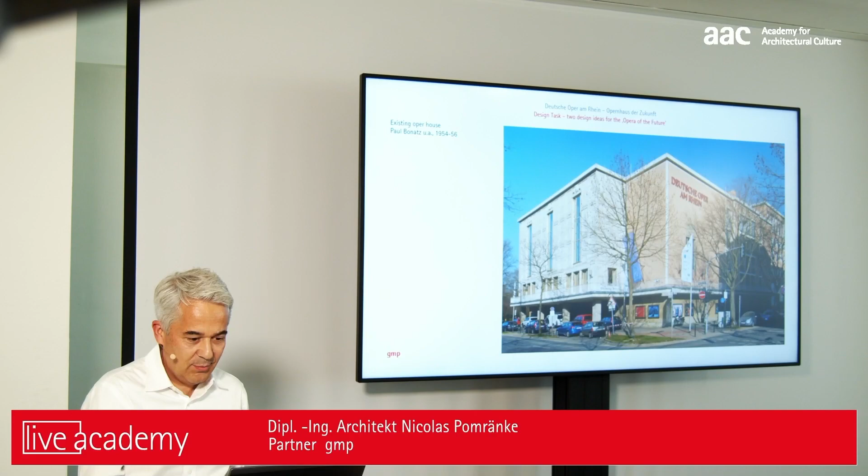We have a small technical problem, I guess. Now it's working automatically somehow.

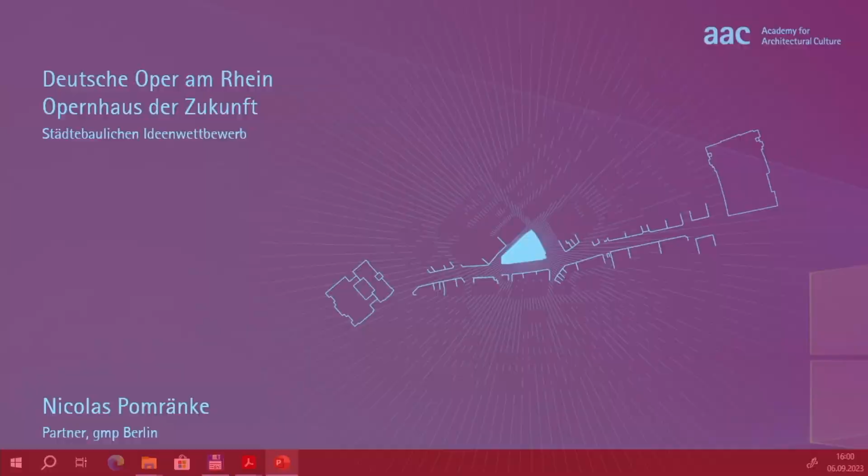So this is actually not a super big presentation, I just have to try again. If not, I'll flip forth and back again.

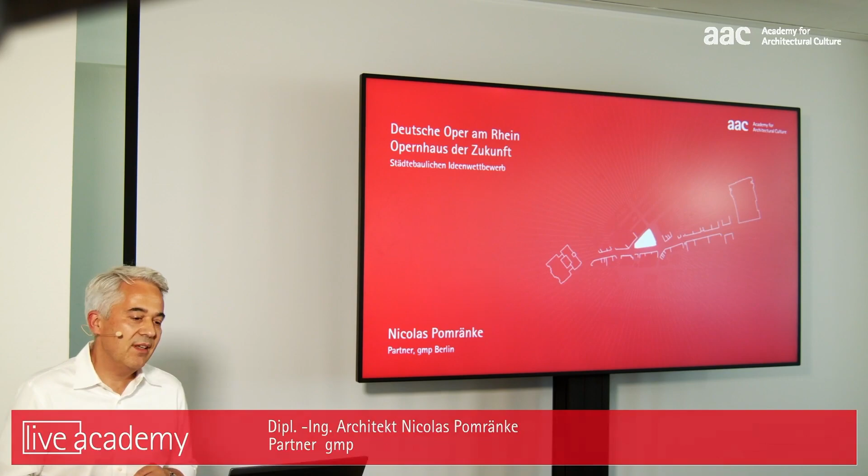So it's just to show you how we came across this issue about reusing department stores. Actually, for the time being in GMP, more than half of our German projects are reuse, refurbishment, extension. This is a very big issue for us. We gain a lot of expertise, but we also think it's a very good approach to tackle the theme of sustainability, simply to try to use as much of the existing buildings as possible.

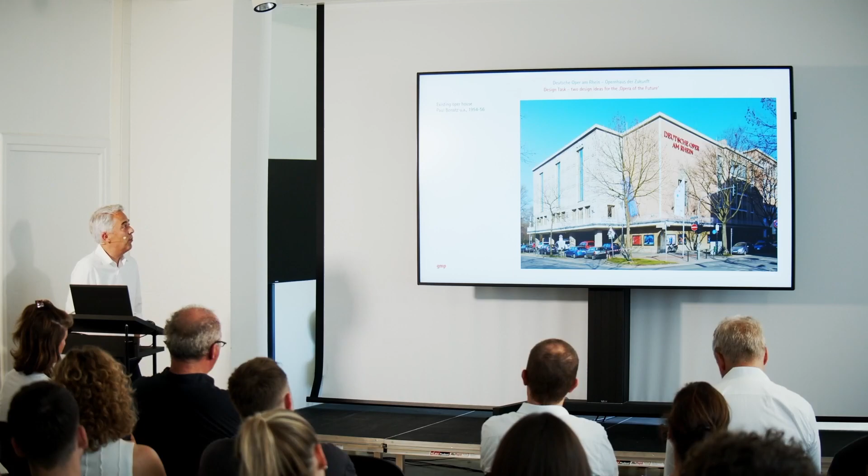This was actually a so-called urban planning idea competition, something a little bit strange because it doesn't really result in a plan. This is in Düsseldorf, in the west of Germany. This is the Opera House of Düsseldorf, which was rebuilt on old foundations after the war by Paul Bonatz, and it's now, after 70 years, really in a dilapidated situation. It has to be refurbished. It's too small to handle modern events and so on, so they have to rebuild this opera house.

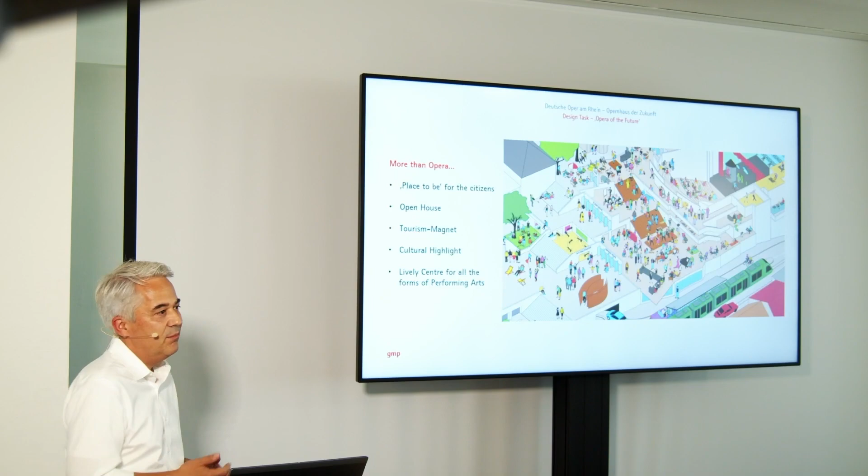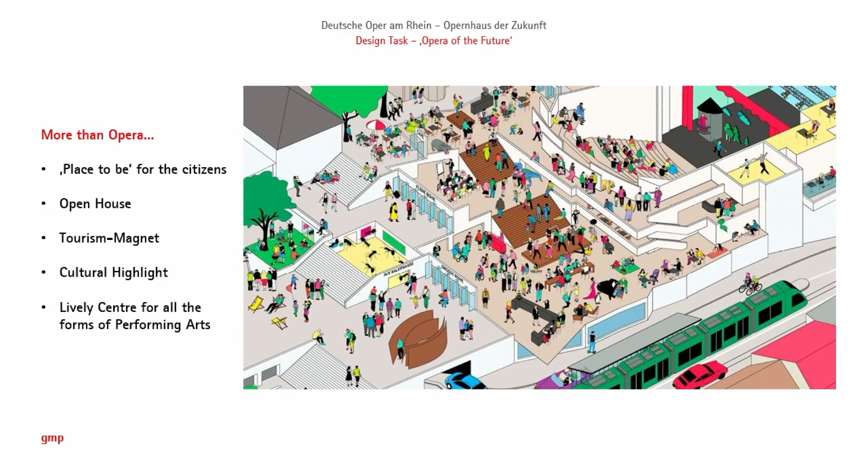They had a very long public process about what they expect, because if a city spends something like maybe one billion euros building something new with all the costs involved, they say, okay, if we take so much money in our hands, we should do more than just rebuild a new opera house. So they had a very long public process and came out with this idea to build the opera of the future, nothing less. The idea was that it's more or less a 24/7 public cultural space for the city.

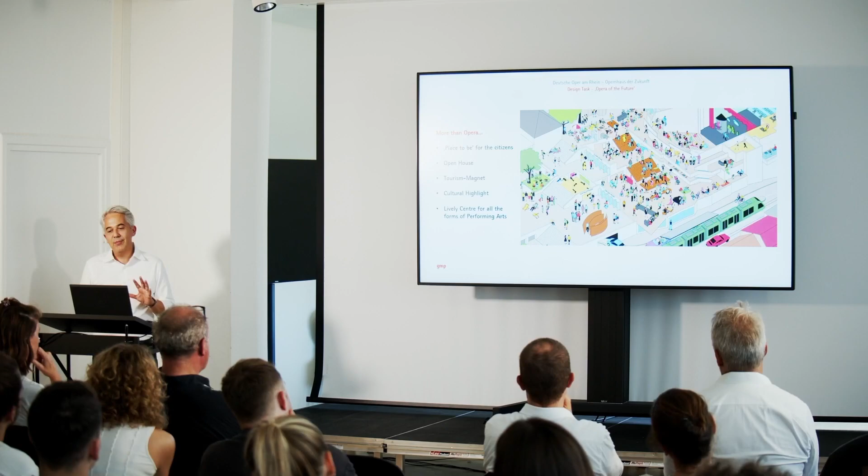So very low threshold, so people can go there even without visiting an event, because there is a very broad offer for all ranges of people in society. An open house, that was the idea, to even attract tourists and so on. So something very different, maybe, from especially what this old opera house was.

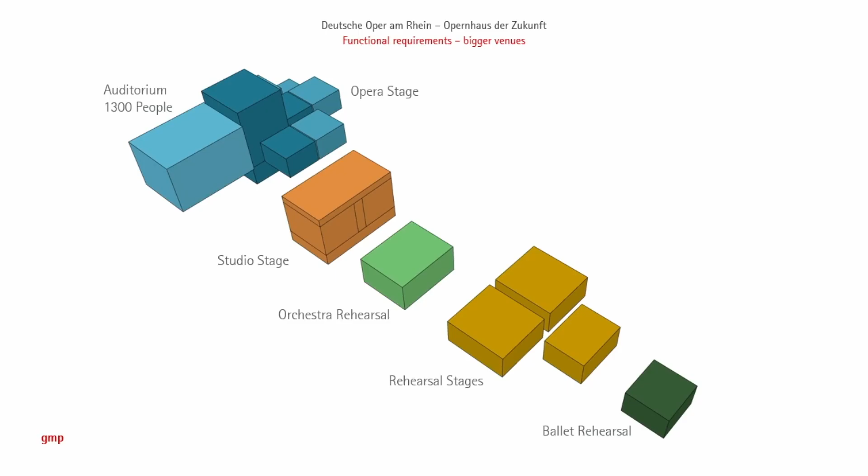The program was classical, an opera, but actually with a very big modern stage, much bigger than the existing one. They want a second, smaller stage, a so-called studio stage, and lots of rehearsal spaces for the orchestra. They also have a ballet troupe and, of course, rehearsal stages. So a quite big program.

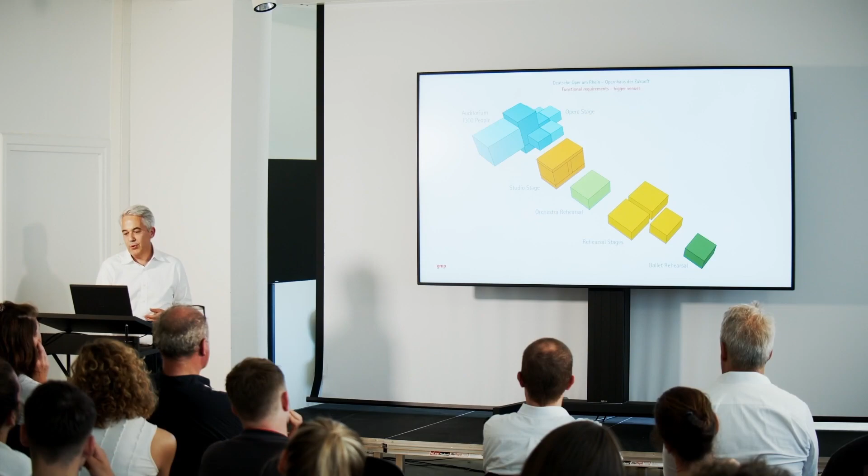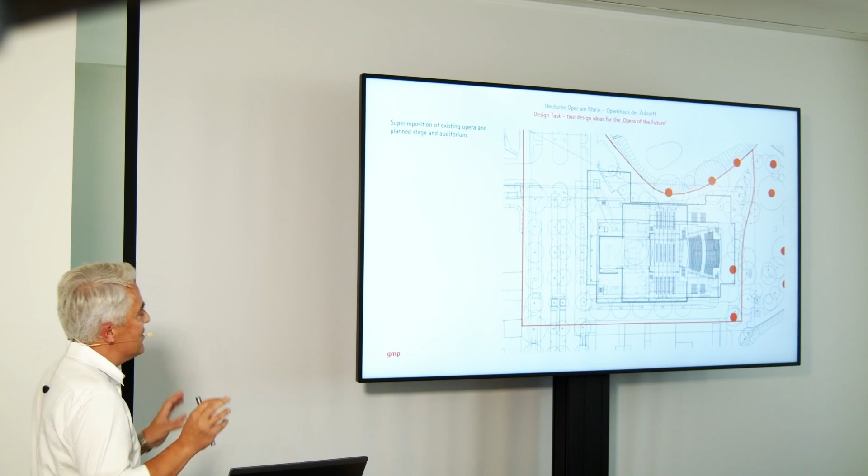And the problem is, this is actually the existing site. You can maybe see this slightly gray building — this is the existing opera house, and the darker drawing is only the auditorium and the stage, without any back of house, lobby and so on. So actually the site, to be honest, seems too small. And these red dots are protected trees. It's a very traditional heritage park in Düsseldorf.

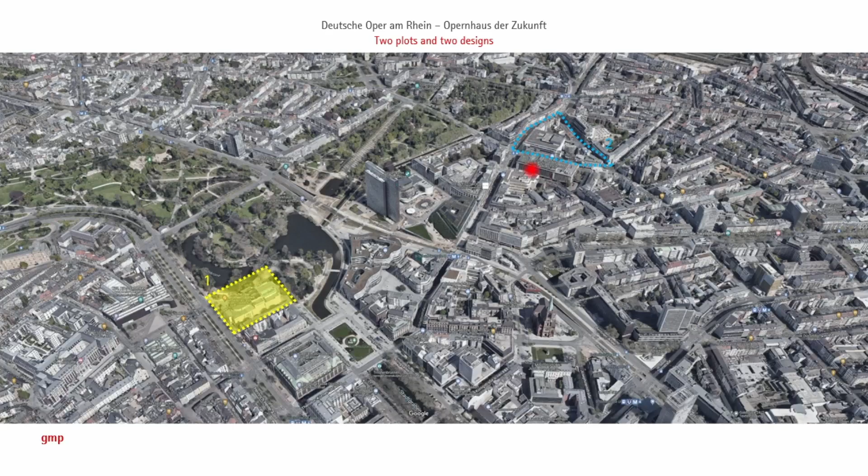So actually the task of the competition was to examine two different plots. The one is the existing one here along this so-called Hofgarten, this park. And the second one, which is the one of our interest, is this one more in the city center, in the very urban context.

The existing site is within this park. It's very close to Königsallee — this is a very high-end exclusive shopping street. So this is a real tuxedo opera location. This is really how one thinks an opera should be like.

So I'll quickly show what we did. This is the one side, and the other side is actually here in this urban context. This is very similar to Mönckebergstraße, maybe not as grand, even a little bit more small scale, a little bit more shabby.

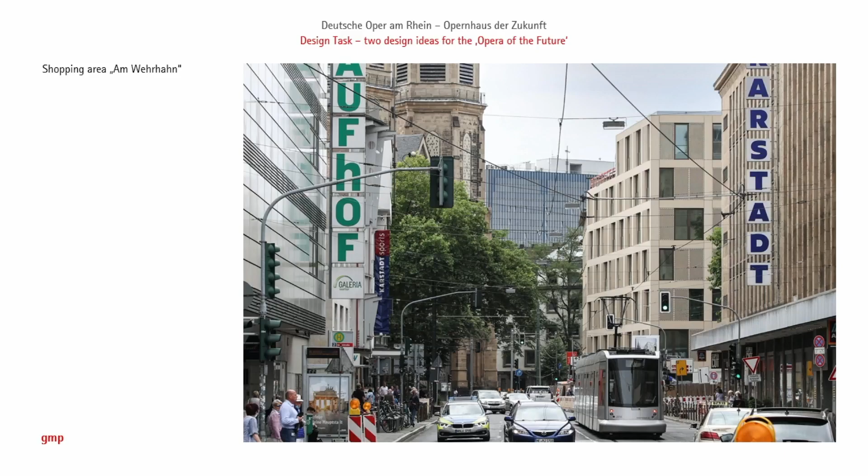This is a regular German shopping street, or has been one, because Kaufhof and Karstadt closed down these shops. This is a very common phenomenon in Germany and all over Europe, that these crowded shopping streets become ghost streets, and it's a very difficult task for cities to make these places in the very heart of each city vivid again. This is the existing, since 5 or 6 years closed, Galeria Kaufhof, same as in your plot.

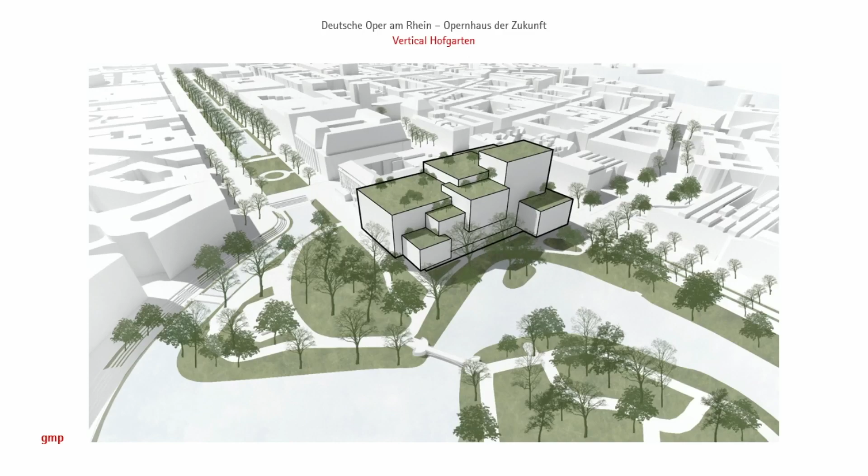I'll just quickly show you, because we had to work on both sides. This was an urban competition, so we had to provide rough floor plans and a volume study. You can see that the site obviously is too small.

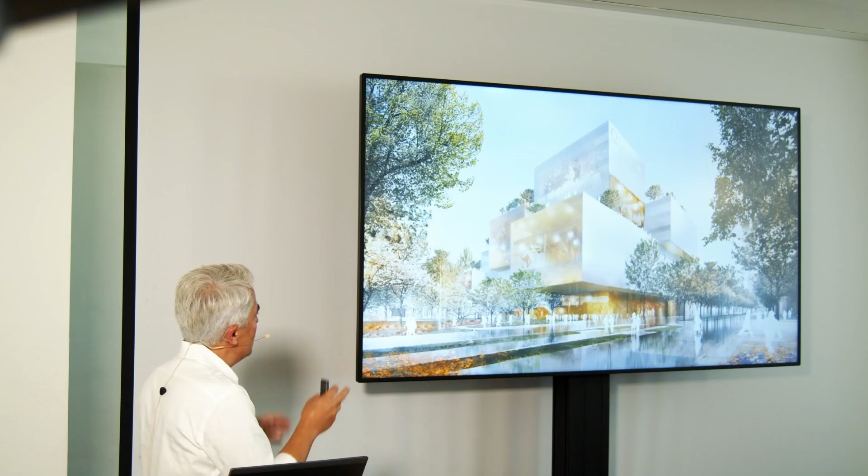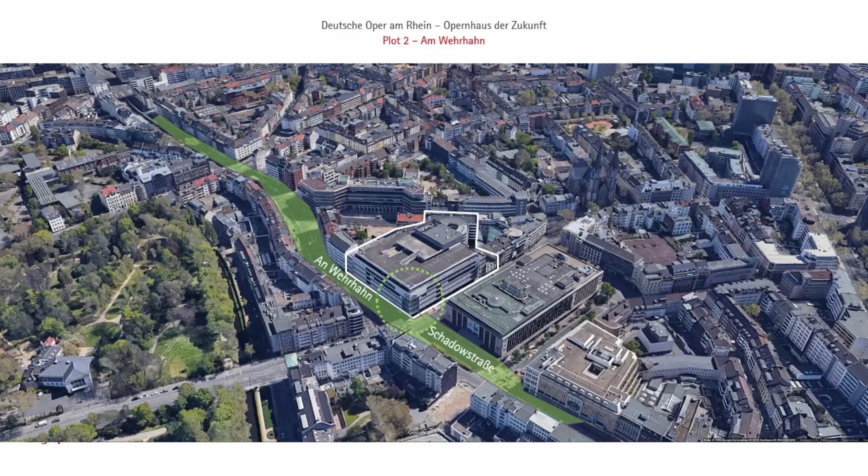We tried to compose these boxes to have views to the park and to the city. But the interesting plot for us is the second one. You can see here the department store, along this main shopping street, am Wehrhahn, which becomes Schadowstraße, also a pedestrian shopping street in this area. This is, let's say, the golden corner of the former department store, but also for the Opera House, the main address.

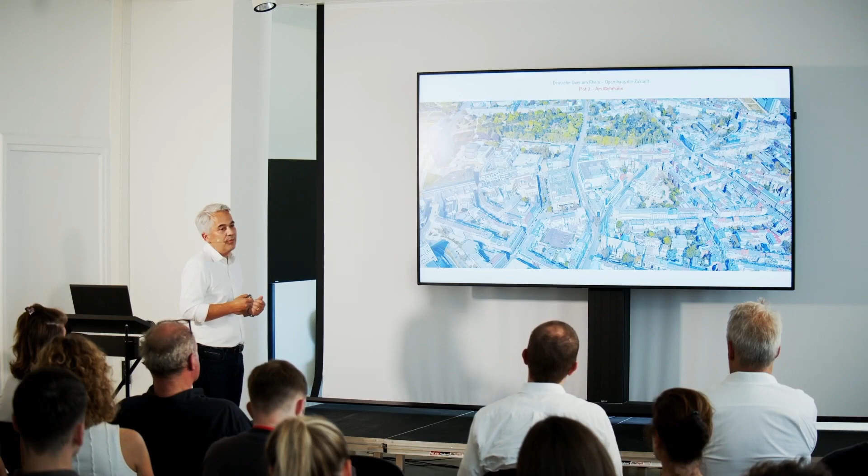The site actually is not only along this main street, it uses nearly the whole block, so it has a second facade on a secondary street, the Oststraße, where it actually houses the parking plots. Parking on rooftops was very regular in the 70s for department stores, so they all have a quite stable structure, because loads in department stores are very high, so the structures are quite flexible and quite robust. So this was the site.

You can see again here this pedestrian part of Schadowstraße, the building, and the task was actually to use the site. Nobody said, please keep the building - they said, this is the site, now see how to implement an opera house on that site.

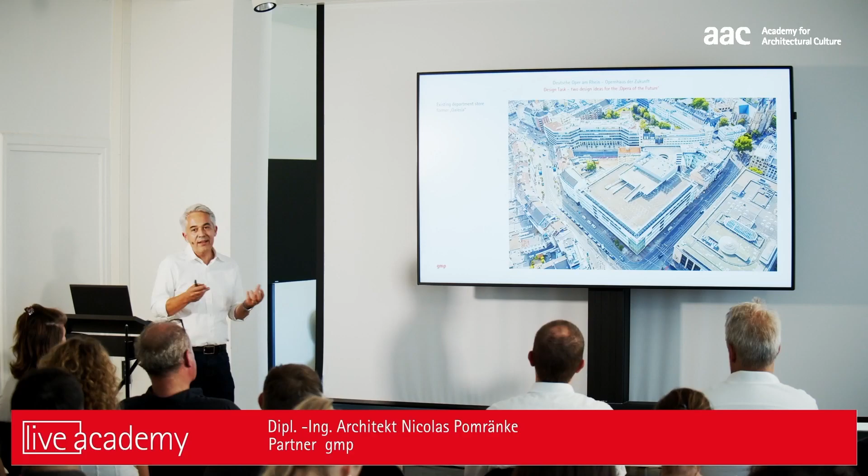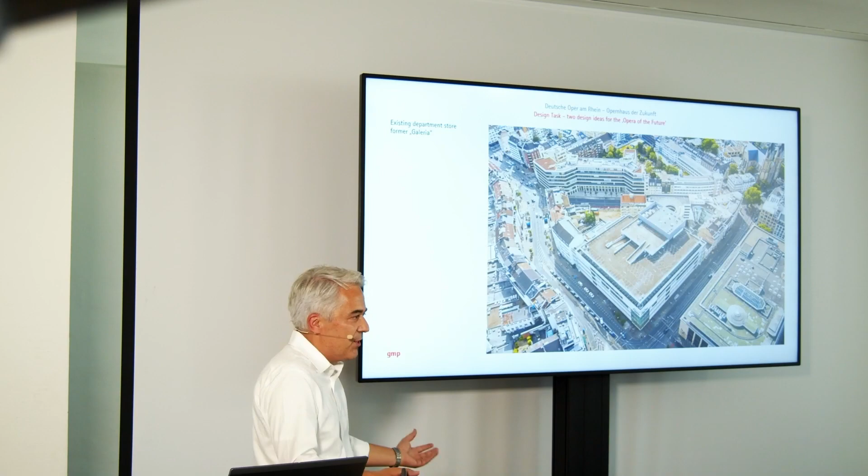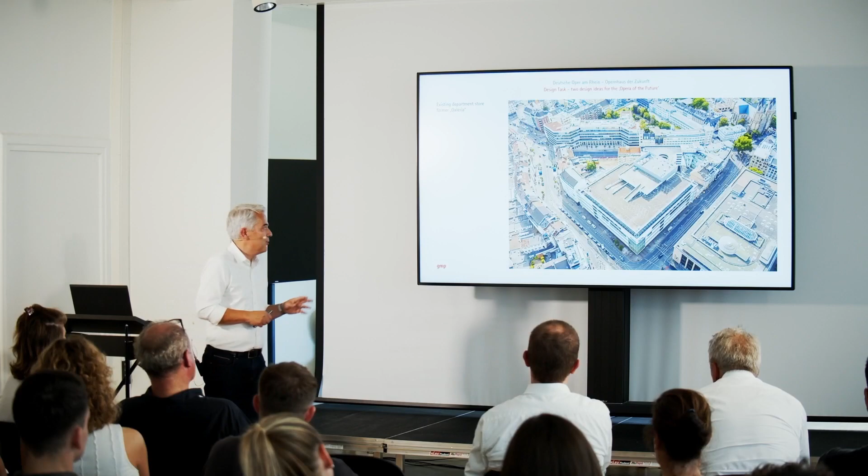We thought, for two reasons, why not keep the structure, as much as possible. First, by our experience, this is a sustainability idea - why destroy very valid parts which can be used. On the other side, there's this idea of what they actually asked for: to have a low threshold, an open house, easy to access, something that also fits this slightly rough and shabby shopping street, and not build a house where you don't dare to enter, where you think you have to wear a suit or a robe to go there. Those were the reasons why we thought, why not keep it?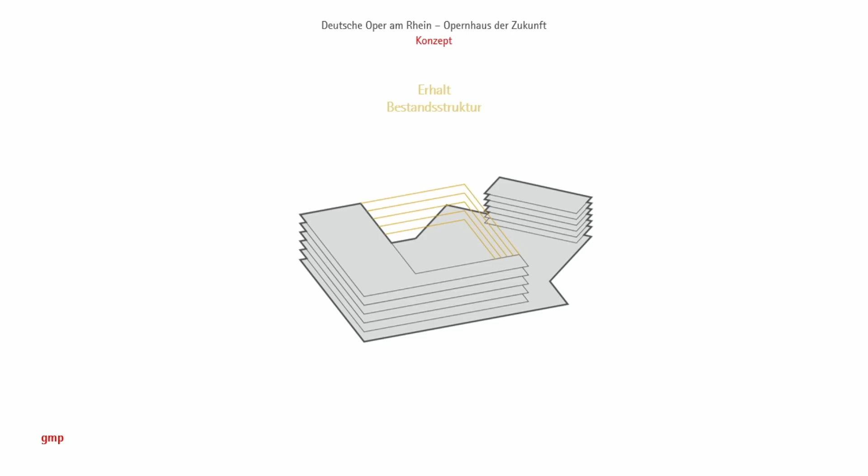If you look closer, of course the opera stage can't really be divided into slabs. So in fact we had to remove a part of the construction, which you can see here. We also removed the spiral ramp because we needed some space, but we could use all the secondary uses and public functions, and use the existing structure, especially along these streets. So the big changes wouldn't have been visible because they are hidden inside the block.

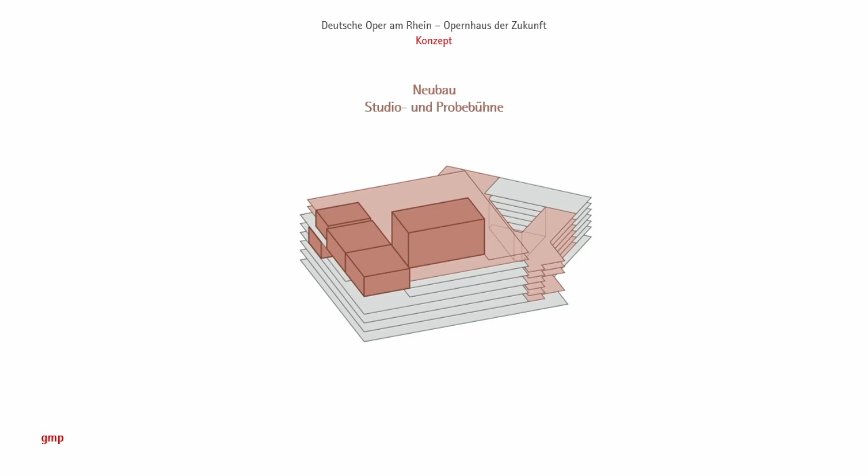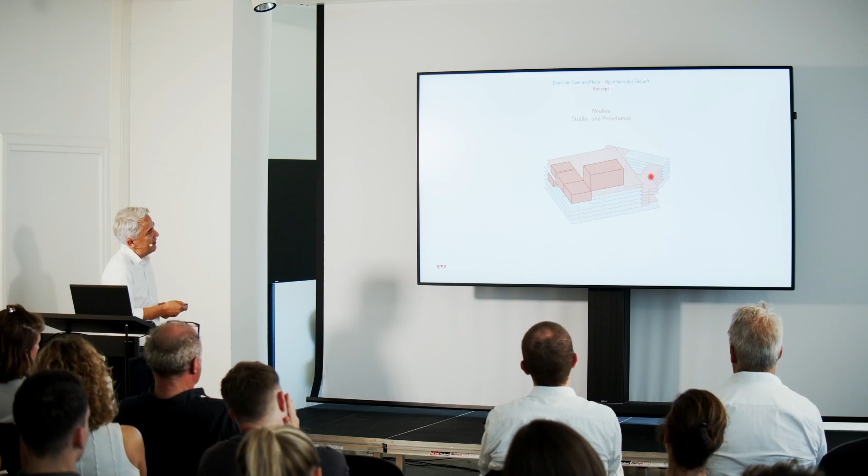So we could insert the big stage and auditorium volume, and put the secondary stages simply on top. As I said, these structures are quite stable - for the very big stage, the studio stage was too heavy, so we put the auditorium as new construction, so we could handle the structural system and not put everything on the existing structure. We also added a few floor slabs to have a circular ring for secondary functions.

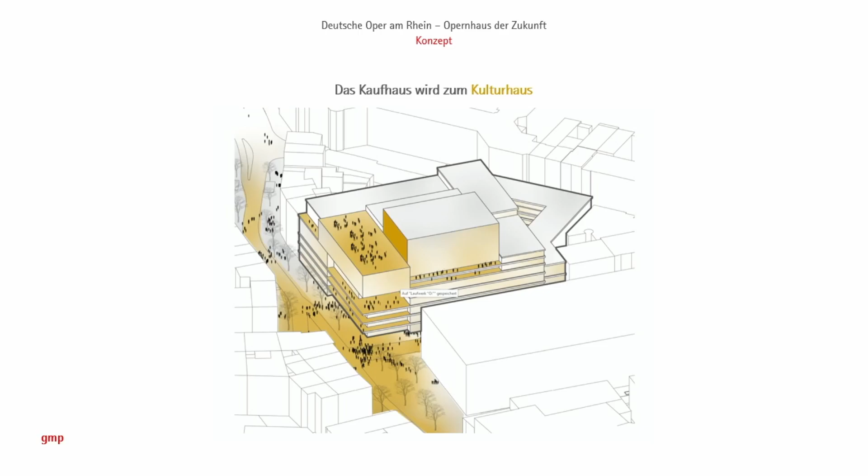You'll see it later. By doing this, we open up the house along this golden corner and try to pull the cityscape into the building, and also develop it in a vertical way. I think this is also an issue for your task - you mentioned that you can even see the Alster from the rooftop. So I think it's very interesting to activate not only the ground floor, but to bring the public into the building, so that all the floors, or most of the areas, also have this vividness of a public space.

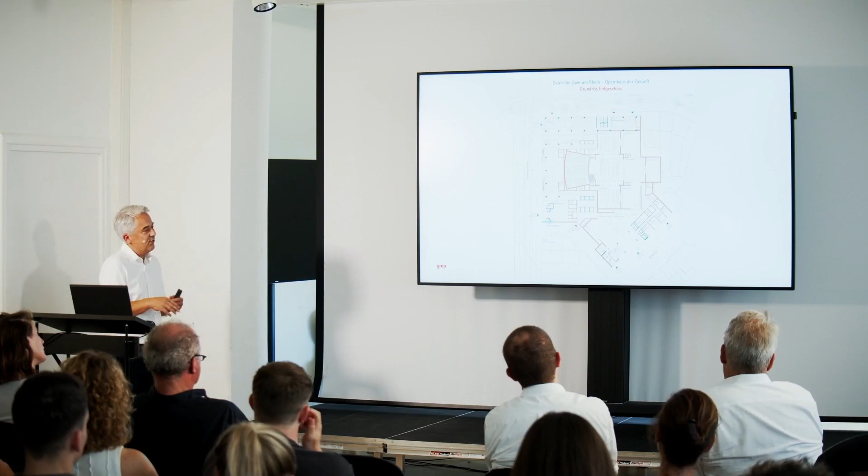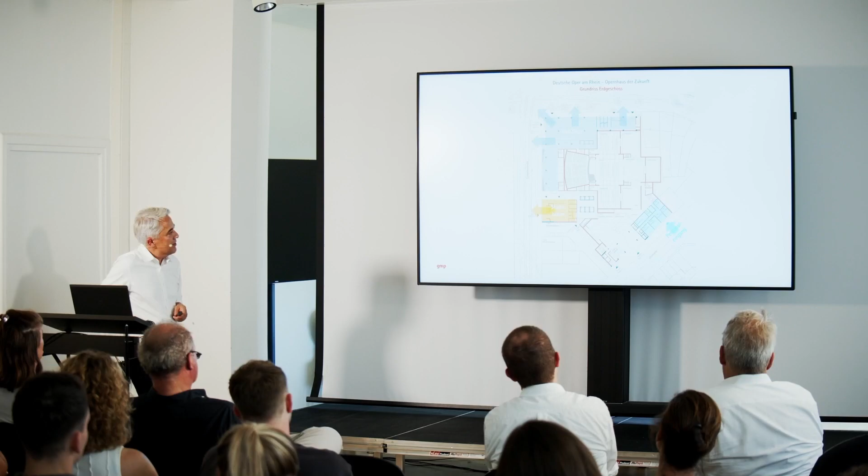Keep it as a very rough and open building. The main lobby is along this corner, there's the studio stage, and in the former parking garage we have the back of the house functions—artist and administration entrance, and a quite tight but possible delivery situation in the existing structure.

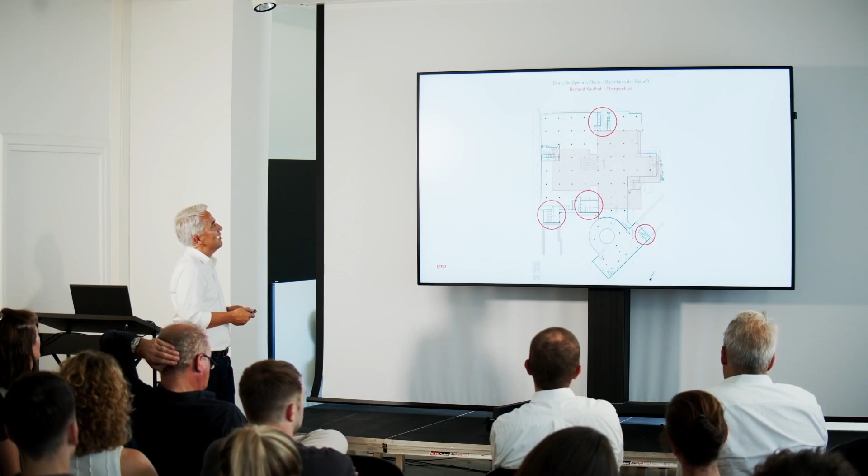This is the building as it was, a very simple, straightforward structure. This is the shape of the stage and auditorium. We did many trials to turn it in different directions, even at 45 degrees, so we could keep most of the area, and especially keep the infrastructure—the shafts, vertical transportation—you also mentioned department stores.

They have very wide escape routes for safety, which is also helpful for public buildings because they have these big escape routes. We kept them also because in this way, when you cut the building, it stays stable, since the cores guarantee the stiffness of the construction.

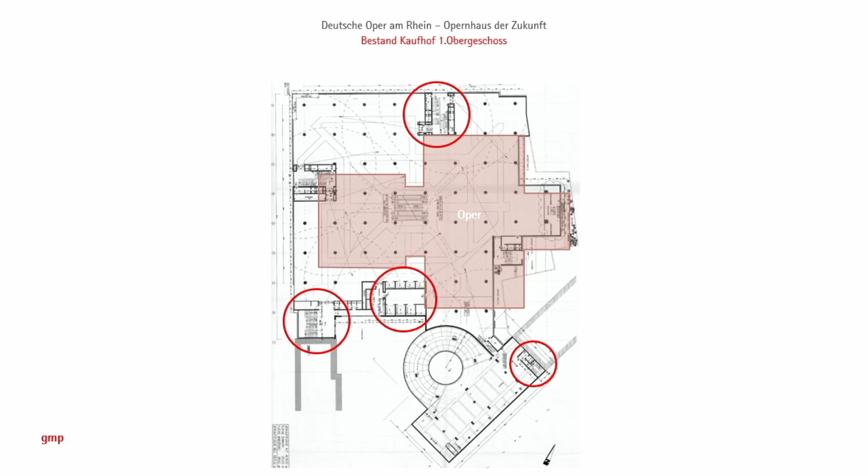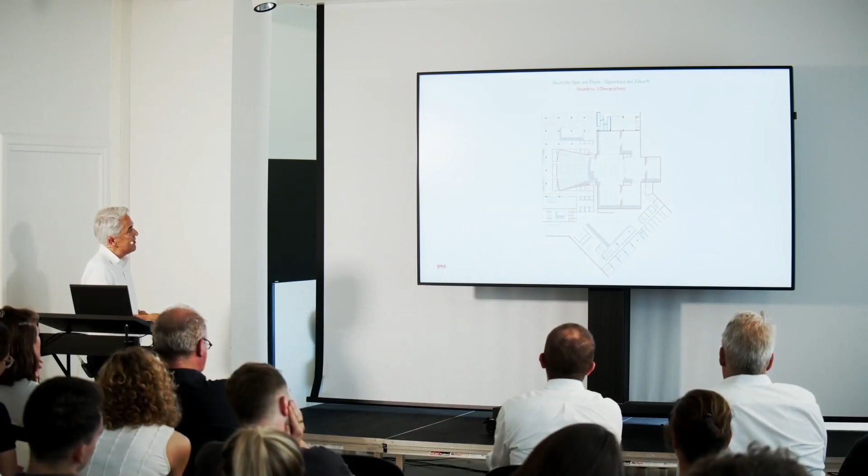This is then an upper level. You can see the lobbies where we also cut some holes in the slabs to have a more complex, vivid space—you can see down to the street or up. You can see the existing cores, which we used again for elevators and escape.

And here you can see this very simple back of the house area with the wardrobe areas, workshops, administration, and so on.

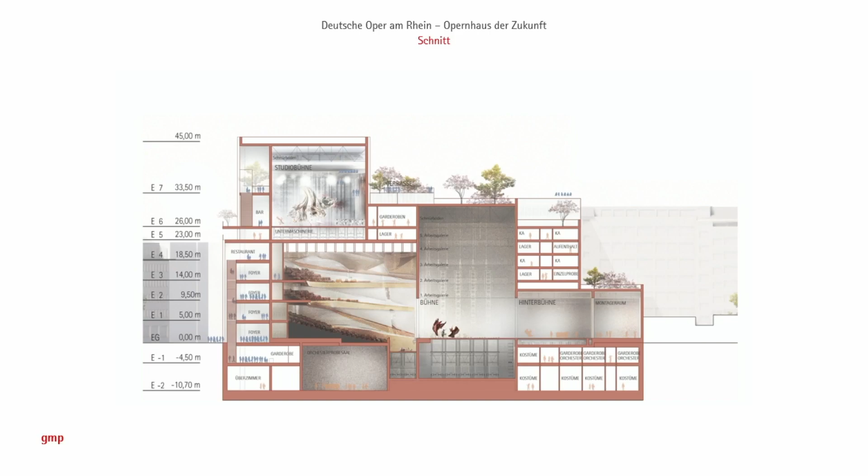This is just a section. You can see here the second stage standing not on the old construction but on the auditorium. At least it's hard to put the stage in this slab-like building, but as I said, we tried to keep as much as we can.

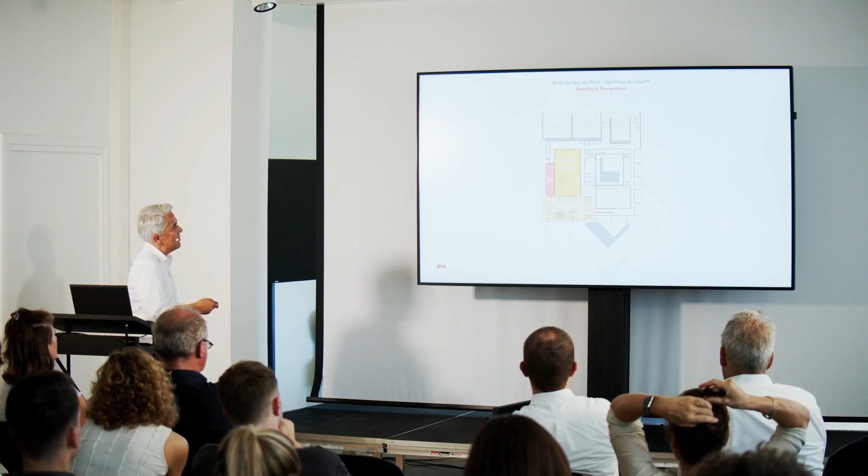This is the Studio Bühne on top, where we have a public terrace. We have a bar here where you could even see the River Rhine, which is in the west of the site—the idea being to have this public building.

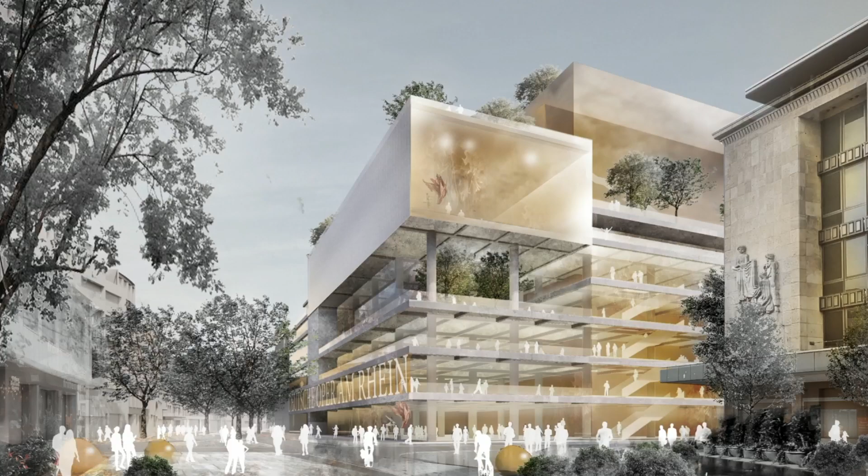This is quite often in German competitions—you are not allowed to do big renderings, only a so-called sketch. So we tried to find a way to show as much as you can, but not get kicked out because you showed too much.

So this was our sketch, but I think it shows quite well this idea of this rough, stripped-down building. You can see the construction of the ceiling slab, the beams, and this open house, bringing public space and green space from the street level to the top.

This idea competition had no first prize, but for each plot they had 3 awards, and we won one of these because they said this is a very interesting idea.

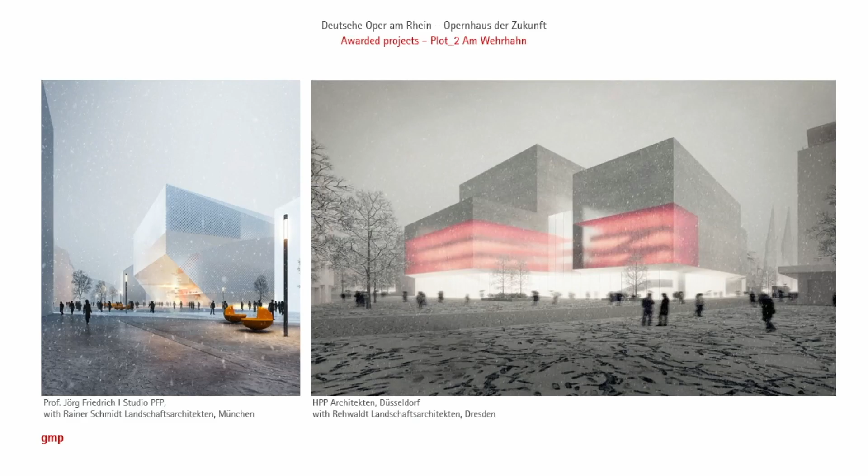So this was a nice idea, but at least this was our approach to using a department store. And I'm looking forward to how you use your department store.